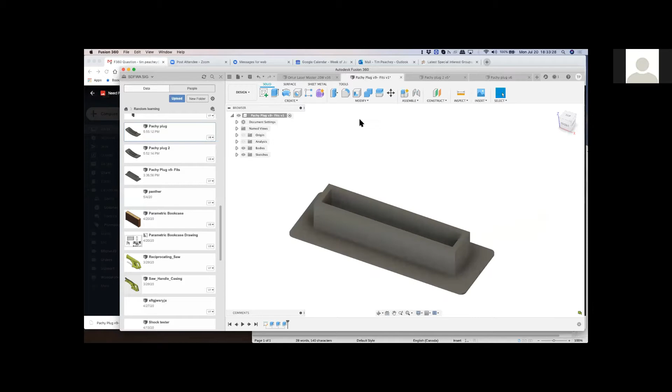Rob made this plug initially, and his question was, how do I curve this to fit into the curved surface? So if we look at the pig, this surface on the bottom has a slight radius to it.

Well, let's take a look at this picture here from the upside down part of the pig, or sorry, of the elephant. You can see there is a radius there.

Yeah, it looks like you 3D print it and then just use a heat gun. That's one way.

The challenge is that inside of it, you have... oh, now we're starting to get a crowd. That's great.

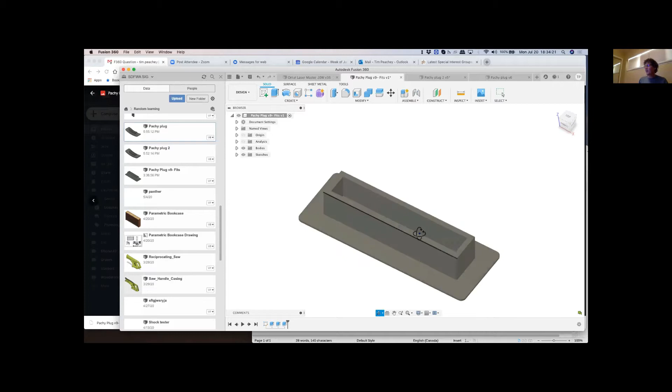Inside of it, you have these vertical walls. They're not going to bend quite as easily. You could notch them, but hey, let's do it all in 3D CAD so that it fits in nicely.

And so is the elephant in CAD? I don't believe that the piggy bank is in CAD. Otherwise, that would make it a lot easier to fit, because then you could try it and look at interference and get a nice, tight fit, etc.

But what I did is I took some guesses. So this is the version that I made, okay? And I'll step through it.

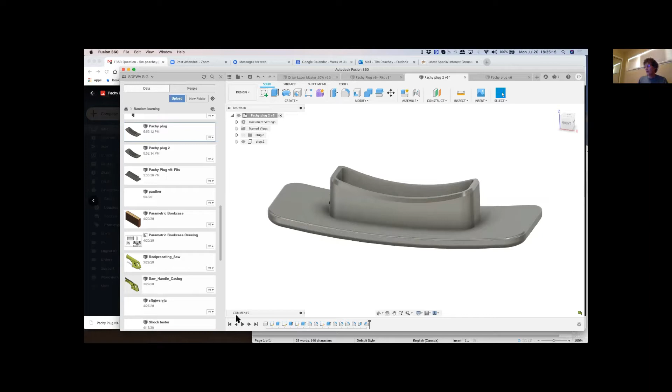Hopefully Rob will be able to see this. But where I started, actually, let's get a full screen here.

Whoops, that's on play mode, and I wanted to go on step mode. No, somebody's got some ping pong noise in the background. Might be Nancy. There we go. Yeah, sorry. No worries.

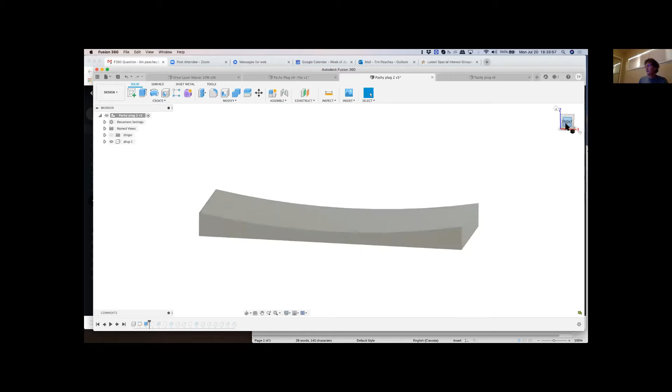So what I did was, first, if you look from the front, I made a profile, a side profile, so that I could get the radius here.

And for the time being, this is flat and sitting on the XY plane. And I made it with the XY plane as my sort of center of symmetry for everything. The origin, sorry.

Okay, so I, of course, started by setting up some parameters. And so I set up belly radius to be this radius here that we're trying to achieve.

The cavity radius, I actually wanted the little tube walls inside to match the radius here of the coin cavity, which is much tighter and not concentric.

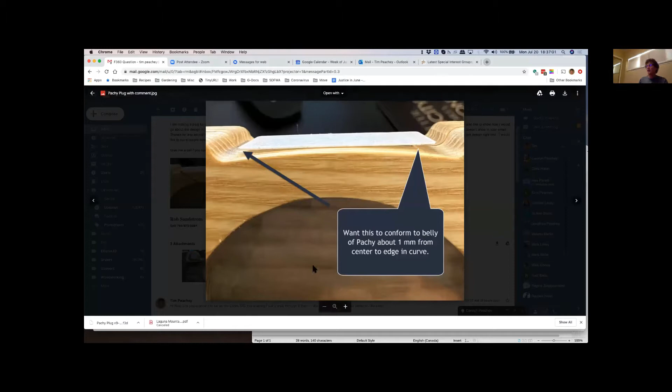I have the length of the... oh, that's something, yeah, the length and width of the slot, the coin slot itself, and then the length and width of the flange, the thickness of the flange, the height of the tube that's going to go up inside the slot, and the wall thickness for that tube.

And then in some variants, I did a retention bump, depending on what kind of material you want to use. I did a couple of different designs just to kind of play around with it a little bit.

But for the simplest design, I first made this curved profile that had the curved surface on the front of it.

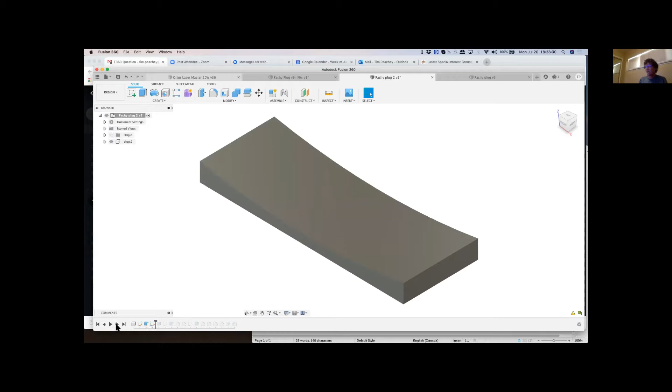I created a rectangle, and this is also created on the XY plane and coming straight up, and that's part of why I left this bottom surface flat for the time being.

So that was just a simple rectangle, or two rectangles. The offset on the rectangles is the wall thickness, or what I called, I think, tube thickness.

And then from the side, or from the front effectively, I sketched this arc with the edges here, and I used the belly radius to drive this curve. Okay, so you see these radii are different and non-concentric.

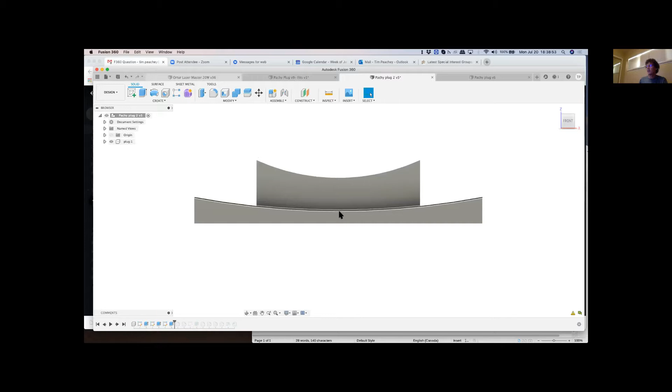The next couple of steps are really kind of clean up. I added some radii.

Then from the front, maybe I should turn sketches on. This would probably be this sketch here. So then I made a sketch from the front here using an offset from here, and chewed away the extra material we no longer want.

Okay, so now I have the shape I want. And after that, it's mostly cleanup. A couple of radii, fillets on the corners, fillets on the top edge, fillet on that inside edge just a little bit.

And I put a fillet around the inside just to strengthen that up a bit. I didn't put a fillet around the outside because that might interfere with the slot.

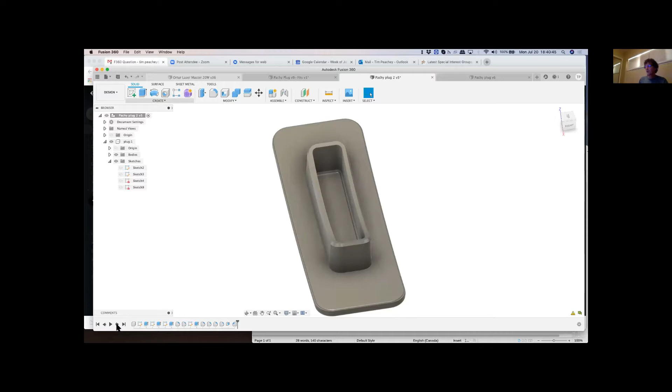And then I put a draft. So a draft adds an angle onto these surfaces, and that's effectively a taper on that rectangular wall, so that it goes in and creates a tight fit as you jam it in there. And then just to make sure that it would lead in fine, I put a chamfer along the top edge.

Now, I'm not sure, did we lose you, Rob? Nope, we got you back. Thought you were on mute though. Okay, I'm up here now.

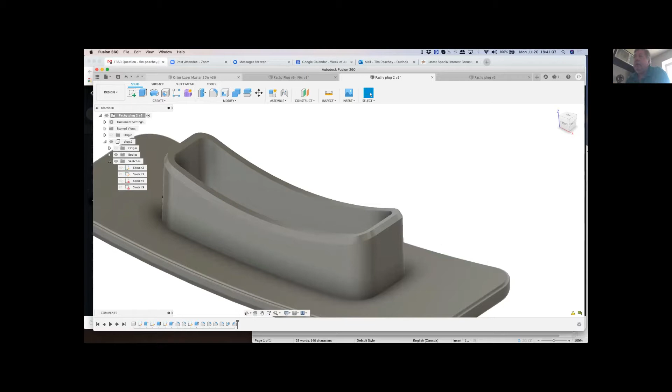So this is exactly what I was asking, and it looked like when you showed us the change parameters, they were similar to the ones I sent you in the file, or almost the same in most cases. So I'm assuming that if you sent me this file, it would almost fit, and the only thing I'd have to adjust possibly is the radius you have here, but it'll probably work just fine as it was. So that's exactly what I was looking for, is how do you get the radius?

Now, people with experience in 3D printing, I think I could just use supports and it would hold up these two corners because they're not radical radiuses, but you did the part that I wanted to make sure I could understand. And I was wondering if that's how you would do it, is kind of build some side sketches, and looks like that's the trick.

And the only thing that I would need to add is a couple of holes on each of the tabs to hold it into the bank. So somebody shaking it hard wouldn't pull the plug out. You know what I mean?

Yeah, I'm not sure what material you're using. Yeah, I did one 3D printer PLA. Okay. And I'm only making that little lip 1 millimeter, so it's real small, thin.

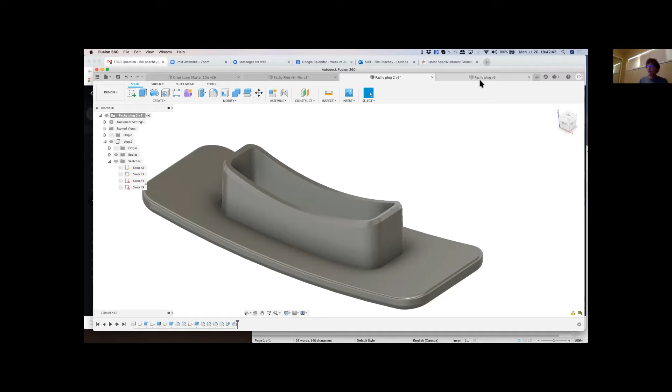Yeah, I did a couple different designs, and yeah, after I got your file, I went in, looked at your parameters, and adjusted my design to follow most of your parameters as well. Yeah, looks good. I like it.

I'm going to turn on my camera so I can eat my hamburger without embarrassing myself.

So here's a different version I did. If you look here, I've got, actually it might be easier to see from the front. I just got a little arc bump around the outside to act like a snap fit retainer.

But when I did that, I cut slots in the side because the rectangle wouldn't compress well. But in this case, if the PLA has any flexibility to it, it can just flex a little bit as you're popping that in.

Okay. Well, it's clear to me you have significantly more design experience thinking through all this stuff that I don't.

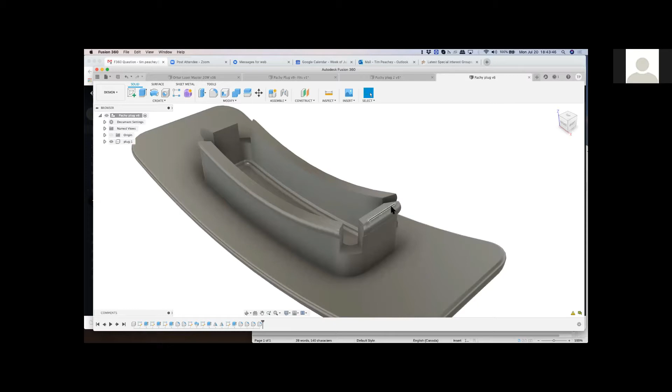It's, yeah, I'm hoping that I can help you guys with experience in the areas I have, and since I'm learning from a lot of you guys as well on the experience you have on the 3D printer itself, the woodworking equipment, finishes, all kinds of questions I have for you guys as I go with my various wood projects. So good learning, sharing makes learning all around.

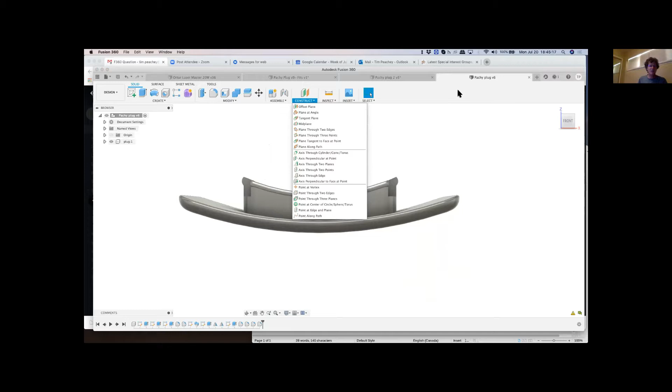Sometimes I'll use what's called, oops, I didn't mean to do that. I'll use an axis. So I'll define an axis and then use that axis as the center point for arcs in more than one sketch. That's another way to do it.

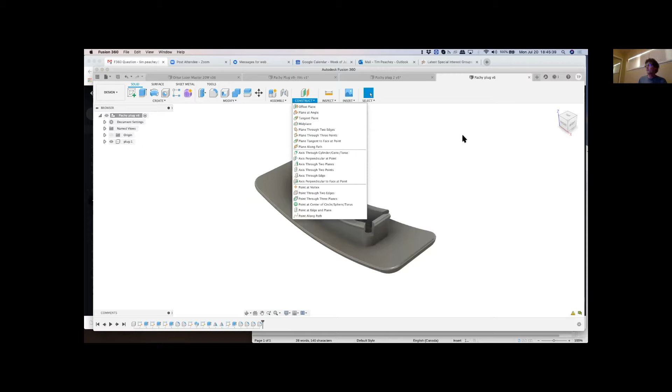Construction features, whether they're construction lines, planes, axes, points, are very, very useful. So they're virtual geometry that helps us define our design intent in the part, but aren't actually a physical part of the component itself.

Okay. Anybody else have any questions on this or anything else that you've been playing around with, looking at before we get into the meat of the evening? Anything else you want to hit me up on?

Well, Tim, I just want to say thank you.

Learning parametric design, I mentioned I had that router table I was putting together. That was amazing. I had different slots, different dado widths, things I wanted to do, and all I would do is change a parameter, and the whole design would change with shelf lengths and everything else. The first time I did it, everything changed except for one drawer I built. I had to go back and look at the constraints to figure out what it was tied to so it would move together. Once I did that, it moved together.

Same thing with this plug. I tried to use all parameters so that if I wanted to change the width or length, the lip and everything changed with it. For somebody like me who never used parameters before, mostly using SketchUp, that is amazing. It makes it a little more complicated to learn, but they are incredibly powerful.

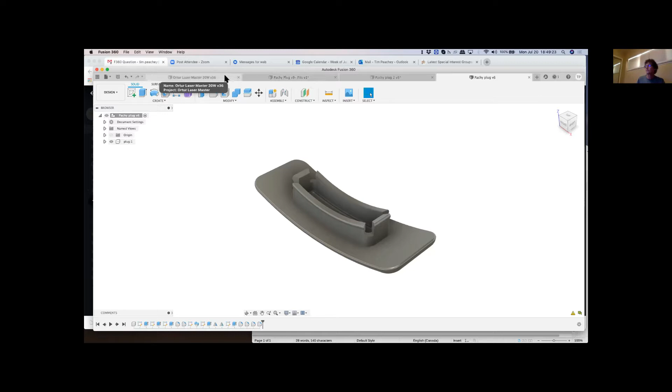Okay, anything else?

You probably recognize this - this is the model I used two weeks ago. I haven't added much to it, but this is my simplified model of the Ortur laser engraver. A lot of components are still missing, but the fundamentals are there, and it was adequate for us to look at assembly and joints last class. This time I want to look at animation.

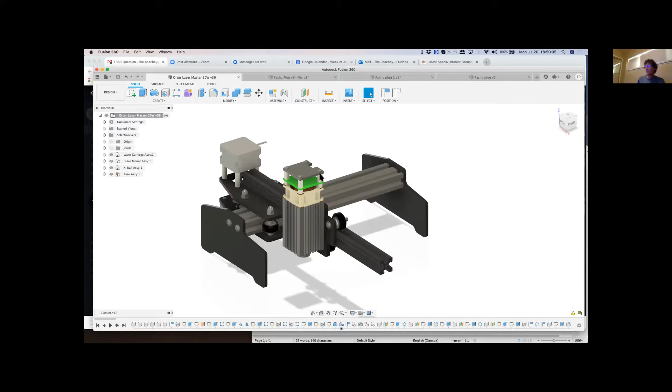If you remember, we set up a bunch of joints, and I thought I was doing this in advance of animation, which I hadn't really learned very well yet. It turns out they're actually somewhat independent elements. But we designed this as 4 sub-assemblies.

We can slide the laser module up and down. It's got limits. We can go in and animate this model up and down. Looks like there's some error in the limits on that one, but that gives you the basic idea.

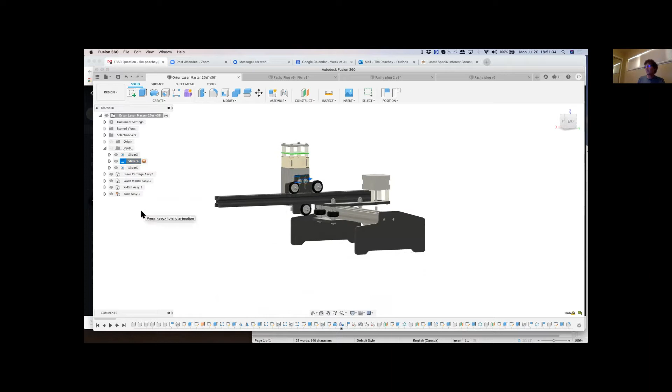We can animate it moving back and forth on the X axis. There might be a better way to stop it, but I'm using escape to stop the motion because it just keeps going.

So like myself, most of you probably assumed this is a precursor to animation, and it's obviously a form of animation. But the animation functionality in Fusion 360 is independent of joints. It doesn't recognize joints. That's good and bad. It's good in that you can go in and do animation, exploded assemblies, etc. in your models, even if you haven't captured all your design intent in joints. If you've done a lot of design in place, it still works.

It's bad in that you might want to use animation as a verification of your joint design, kind of like a mechanical simulation.

So when you go to the animation workspace, you get a slightly different user interface. In the browser, you'll see the components and the component tree. Sub-assemblies will pop up there, but there's no bodies, no features. The timeline's replaced by an animation timeline.

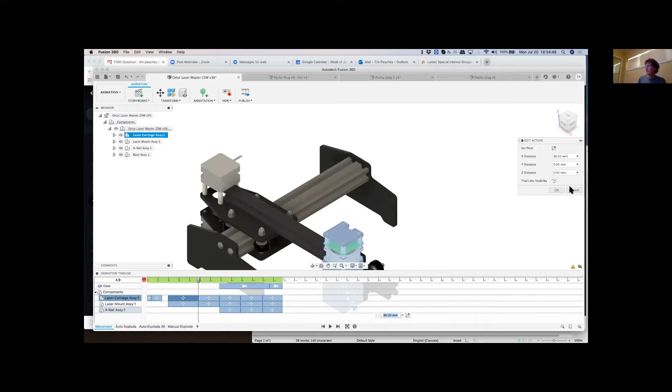Once they're here, we can edit them. We can move them to a different sequence, we can change their duration. If we edit an action, for example, we can change how far it's going to move. In this case, it's an 80 millimeter move, and we could change that in the X direction.

Once we have the animation in place, we can also animate the camera behavior, and sometimes we do this without actually intending to. I'm going to get rid of that one. Right now, when I'm moving things around, it's actually capturing some of that. If we store the playhead in what's called the scratch zone here, then if we move things around, it's not captured.

Or if we turn off the camera -- right now the camera's kind of on -- but if we have it out here where we're doing things, and then we move some of this stuff around, it will assume that we meant to do that as part of the animation. So that's a little warning. I'm going to delete that.

If you looked at any of the videos I tagged in the post I made today, one of them, the first one, is doing an exploded assembly, which we're also going to do here. The second one was actually doing an animation of a toy, in that case a toy helicopter.

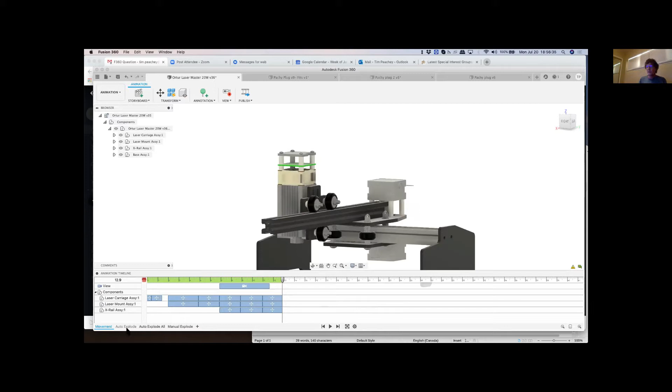There's a tool called Auto Explode, where you explode an assembly, and it's of marginal utility. If your assembly is pretty simple, you might be able to use it and maybe edit a little bit after the fact. But what this looks like is, in this case, I did it by subcomponents only.

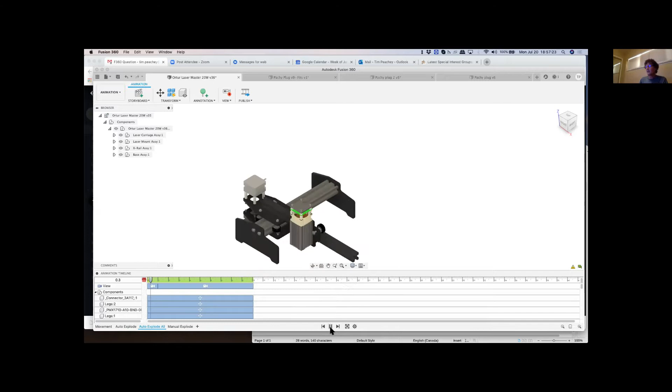In this case I did a full explode -- let's go back to the beginning and do that again. So now it's zooming out to make room, and it's exploding all the parts so that in theory you could use this for an assembly drawing or a parts list or something like that.

The problem is that where it puts things automatically is rarely where you really want them to be in a good exploded assembly view or exploded parts list. Do you have the ability to move those around once it explodes? Yes, you do. So, for example, you can come in.

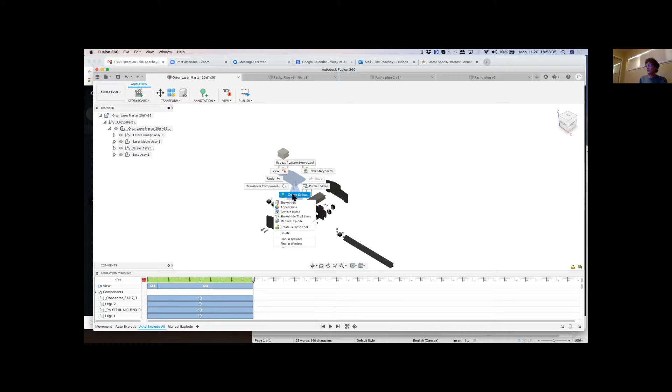You can find your part here, and then do an edit action. It's going to come up, and you can change it. Say I didn't really want it there, I'd rather have this piece over here for some reason. Now it'll save that as the new desired exploded location.

And when you rerun the animation, that's where it's going to put it. That's not a particularly good place, that was just to show you how it would work.

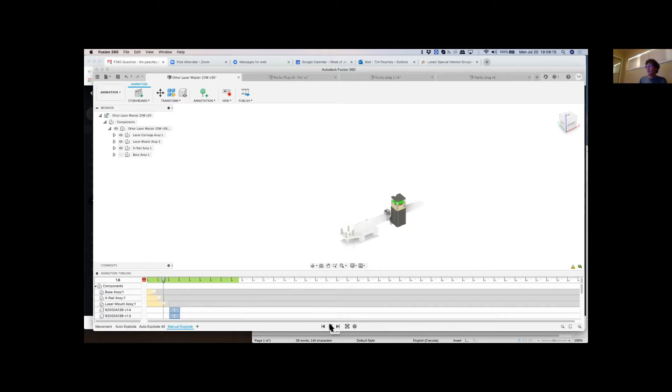What you're more likely to do, especially if you want something accurate, exact, or detailed, is a manual explode. In this case, I'm doing a couple of things: turning off everything except the laser carriage assembly, and then exploding the components of it.

Now you might say, hey, I thought you said it's for an assembly purpose, that looks like disassembly. And you're right. Interestingly enough, if you right-click on the storyboard name, you can hit reverse the whole storyboard, and when you run it, everything happens in the opposite direction.

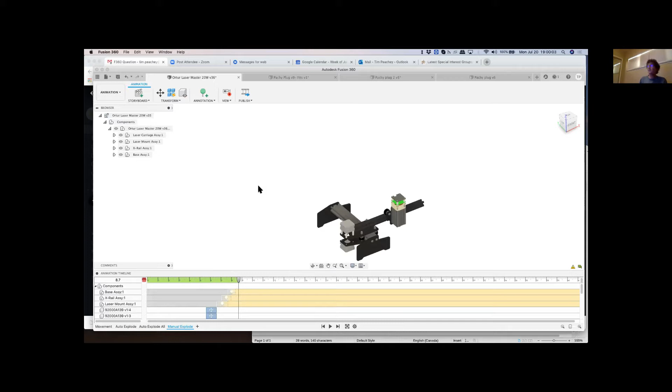So it's pretty basic, that's the key part of it. That's what the videos look like. There is an annotation which is not that useful.

I did use annotations here, and in Fusion 360 you can click on them or roll over them and see what that annotation is. But once you create the MP4 file, none of that happens. You just have these silly stick pins, push pins around that don't do anything for you in the video.

So I'm going to create a new storyboard, the same thing you'd do if you came in with a new drawing or new assembly, you'd automatically start with the first storyboard. Let's add a storyboard. The question is, do you want it to be clean or start from the end of the previous? Like I said, you can make your storyboards consecutive or not. Let's start clean, and now here's my model.

I'm going to put this in the scratch zone because I want to move this above the animation timeline here, since it gets in the way. So there are a couple of things we can typically do.

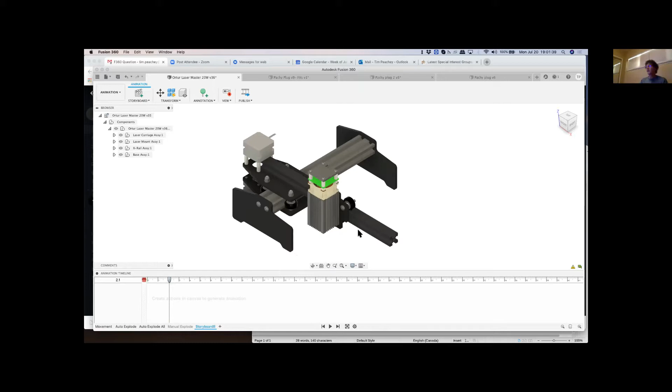Let's say in the first 2 seconds we want to do something. What do we want to do? One of the things we could do is go to a front view. So now our animation consists of moving to that front view.

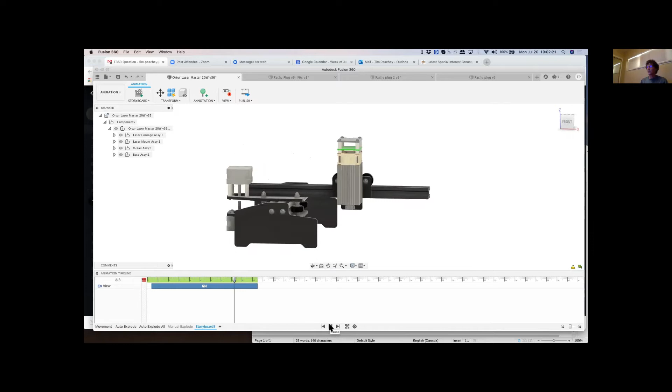Having done that, later when we've made a bunch of other changes, we can move this camera action to a different time, we can make it longer, etc. So we have a lot of ability to change things after we've done them the first time.

I actually can't see much in this, so I'm just going to delete that camera action for now. I'm going to go back here, and say that in the first second we'll do the animation routine.

So in the first second, I'm going to take the laser carriage assembly. There's a couple of different ways I can do this: I can right-click and say transform component, or come up here under the transform menu and transform components. There's even a shortcut key, M, in this case, which I guess is kind of like move.

So let's transform this component, and we can either do it manually, like any other move, or type it in here if we know exactly what we want. The transformations can be X, Y, Z, or rotating about the X, Y, Z, not about the axis, but at an angle around there.

And if we're rotating and it pivots somewhere we don't want it to, let's say for example we wanted to pivot about the X-axis, and we put in 30 degrees, and said, well, that's not what I wanted it to pivot around. What's it pivoting around? It's pivoting around basically the base of the laser, and I wanted it to pivot around something else.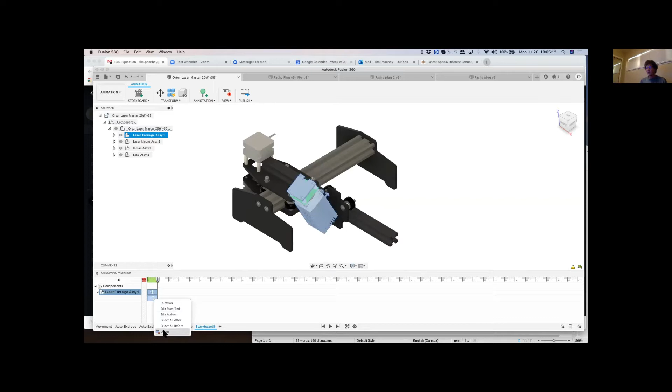And it crunches. Oh, it didn't work actually. It didn't do what I expected it to do. Somehow I didn't get that pivot in the right place. Let me see why that is.

This transformation here, if I set a pivot, oh, it broke the two actions. It broke the two actions. That's kind of interesting.

Pivot has no meaning when it's X, Y, and Z only, does it? So when it does this, it's not compliant with any, or you're not restricted in any movement, any legal movement of that component within the assembly. Correct, that's a very salient point. You can crash into things, you can go through things. It has nothing to do with the joints, it has nothing to do with reality. It's blindly following what you tell it to do.

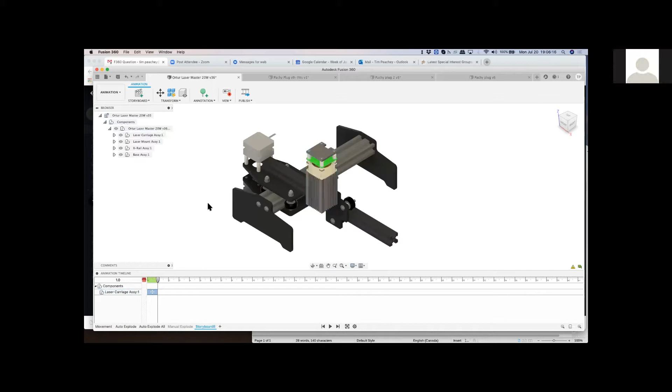Okay, so maybe I want to move that back down in another second. So I'm going to come here and do that transformation, except this time I'm going to go... come on, it's the set pivot, I've got to figure out a little better how that works. But I'm going to go minus 10 in the Z direction.

So now when I run my animation, something went weird. Something went very weird here. What happened? Instead of going in Z, it looked like it went in Y or something. Yeah, that set pivot, I did something wrong with the set pivot.

I'm going to delete and redo that part because that set pivot messed things up for me. And I'm also going to do it a little faster while I'm at it. Let's go to half a second, and let's do it this way. We're going to say transform, grab this guy, and do 10 millimeters in Z.

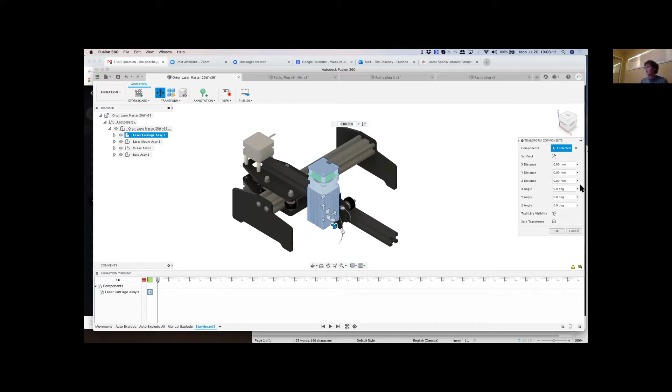And then we're going to do another half a second, and we're going to transform, and do -10 in Z. Okay, and now when we run it, it's just going to pop up and down. So kind of showing us that that's possible.

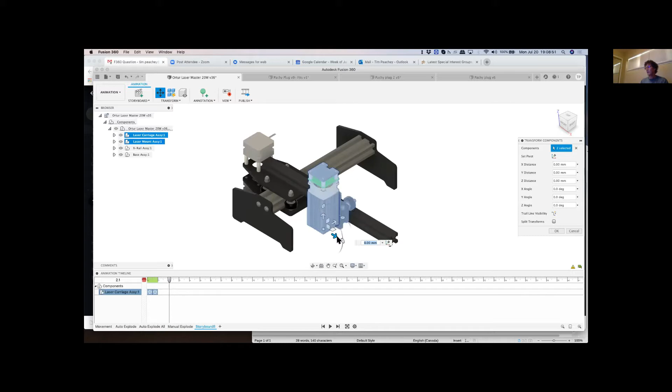Now, next, I'm going to take 2 seconds, and in those 2 seconds I'm going to move. I'm going to transform, but this time I want the laser carriage assembly and the laser mount assembly, and I want them to move out to here. Okay.

And sometimes it does a weird thing, so you got to watch this thing, it can't always be trusted. So this did something that it shouldn't really be doing, but you need to catch this. So when we run it, it's going to go up and down, and the carriage moves before the laser does. And when you look down here, you see on the laser mount timeline, it started at the half second in rather than the second in.

So a couple things you can do. One is you can come here when you're down to the 2, when you have the 4 arrows, that means you can move the whole thing around. But that's not really what we want. If you go at the 2 arrows, you can now move the start, and you can do the same thing at the finish.

The other thing you can do is hold your Apple or Control button, select them both, and then say duration, 1, and let's do this again, and we should be able to align end time. Now they're aligned. Now they should move together.

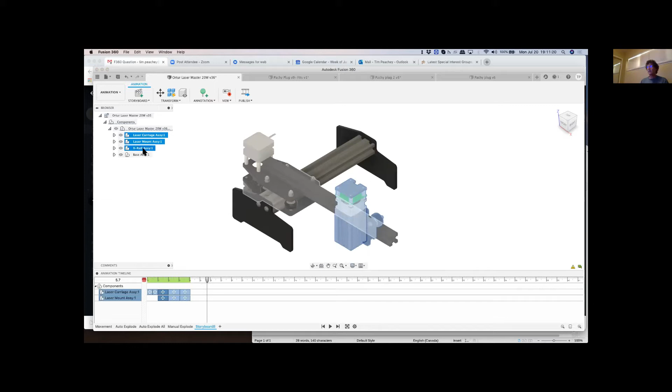Now I'm going to come out with the next second. I'm going to add to this the X-rail assembly. I'm going to transform all 3 of these in this direction. And again, just to show you, there's no physical reality. We had limited the joint there, but it's not limited to the joint, so we can do this. And when we play it, you can see the actions we did. Blindly following.

So can you tell me what the difference is between the simulation and the animation? So simulation is something entirely different, it's really should be called analysis. It uses a technique, a computer technique called finite element analysis, and it gives you the ability to analyze when things are going to break, or how heat transfers on them, how they vibrate. So it's really an engineering analysis tool, simulation is. It's not something I would typically do with woodwork.

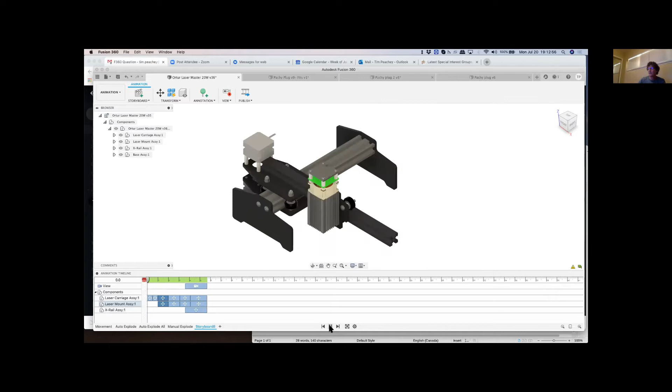So that's the motion part. And then, oops, I accidentally made a camera action. But let's use it. So when we do this, see that camera action where I zoomed in and out? That happened there. That's not what I really want though.

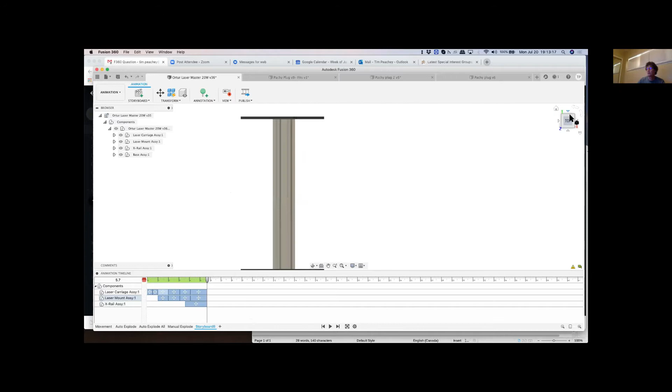What I'd rather do is let's go to the top view now. Okay, and zoom out so we can see it all. Okay, so now if we play it, that's what it's going to do.

And again, we can take this camera action and put it in a different location, change its duration, and now it'll do that on different timing.

And when we're done with it, we can publish the video. We can choose the current storyboard or all storyboards. It'll just chain them all together. We can pick video resolution. And we say okay, it'll take it 15, 20 seconds. It'll sit there and crunch away, maybe more depending on your animation, how complicated it is, and generate an MP4 file.

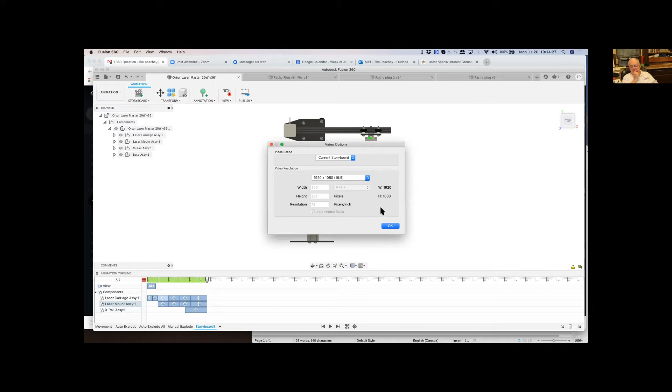And the MP4 files are actually pretty good. They're much smoother. You see how jerky the animation is here? It takes a little bit of time. It computes it on the cloud.

But let me, where was it? We don't need that. We need this one here. Let me bring it over here, and you can see what it's going to look like. You see that's a much better resolution. Smooth motion. It's not quite render quality, but it's pretty good.

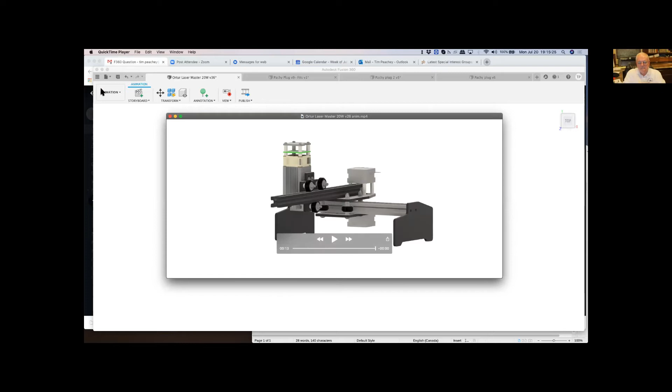Okay, let's see here. Where are we? Did I miss what you were saying about the belts? Or have you figured that out yet? I haven't. You didn't miss anything. I did. It's going to be tricky. Yeah, they're a little trickier. If you go to the Autodesk website, there is a demo that includes a belt. And I had looked at it back a few months ago when we started this exercise. And we started looking at Fusion 360 and haven't gotten back to it yet. But yeah, I want to do the belts as well at some point. And I was thinking too, what I should do is put either some kind of tread or spokes or something on those little wheels and show them moving just to be more complete.

Now, do you have like a real simple drawing with maybe 2 or 3 parts that you can just show us from the very beginning, from when you come in to this screen, how you do it?

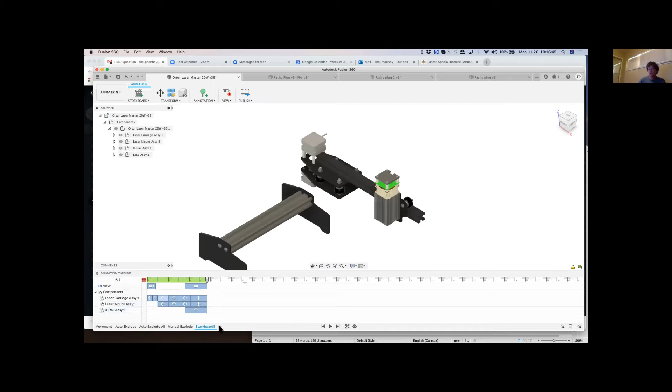Yeah, you know what? Why don't I just bring in the, well, let me do a new storyboard. And what I'll do is, actually, let me cancel this. Let me go back to the design workspace, and I'll just simplify this by turning things off. So I'm going to only have this element here, which has a few components. Okay? And we'll do the exploded approach, which is very similar and related.

So we'll go to animation, and I'm just going to do a new storyboard so this would be like we just came in from scratch. And now I'm going to do what I would more typically do, which is a manual explode, where I'm specifying what's going on.

So if we go to manual explode, and I'm just going to look at this guy here, and it's more than 3 or 4 components, but a lot of them are kind of paired together. So at this point, I want to explode basically almost everything. I don't want those guys, I want these guys. So all these guys here, I'm going to explode.

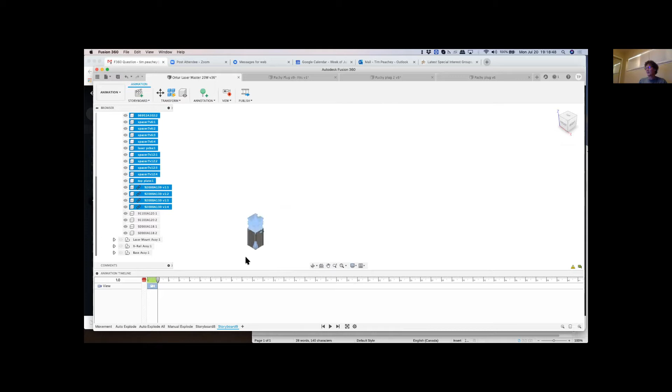And what I'll do is, I'm going to explode them in Z. Whoops, did I get something I didn't want there? These guys here. That's the problem with using part numbers. Let's cancel that. Let me figure out which ones those guys are. And meanwhile, let's zoom in a little bit. We'll get that guy later, but...

Oh, that's these guys. Okay, so what I really want to explode is from here, oops, from here up to here. Come on. Why? Oh, wrong button. Shift is what I need this time. Up to here. And then I want to add in the fan and the lens. Okay, so these are all the elements I want to explode. I'm going to do a manual explode in Z. And I'm going to play with the explosion scale here a little bit.

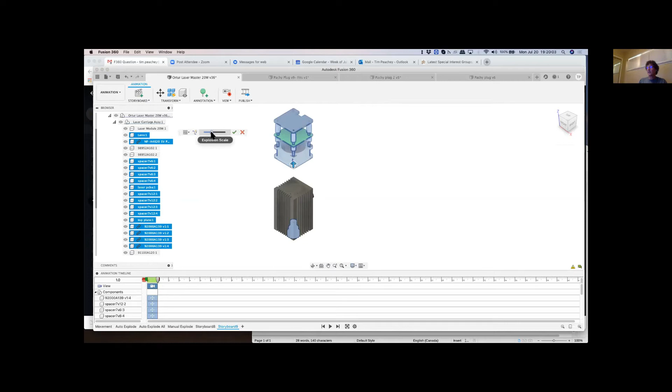And it's done something, but it's not quite what I want.

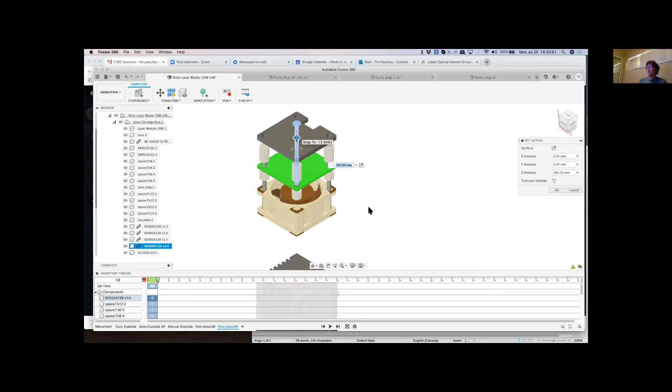So I can either do this and edit it, or I can do them all one at a time. If I do them as a group, now where did those screws go? Those screws are inside there. What I can do is come along on any element here, come down, find the elements, edit the action, and drag them to where I want them. And they'll update. Okay, in theory they'll update.

Did I hit the wrong button? Edit action. Come on. It's not playing nice with me. 100. Okay.

So that's one way you can go about it. Things are a little slower tonight. It might be streaming video in another room eating up some bandwidth here. Since Fusion 360 uses a lot of server calculation, it is affected by bandwidth.

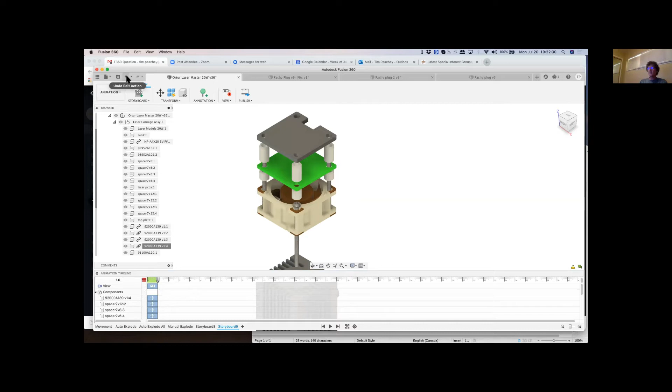I'm going to undo the explosion and delete the camera action so that we're starting over from scratch. And I'm going to try and do a little closer to what Howard was asking for. Let's try and do this a little simpler. So...

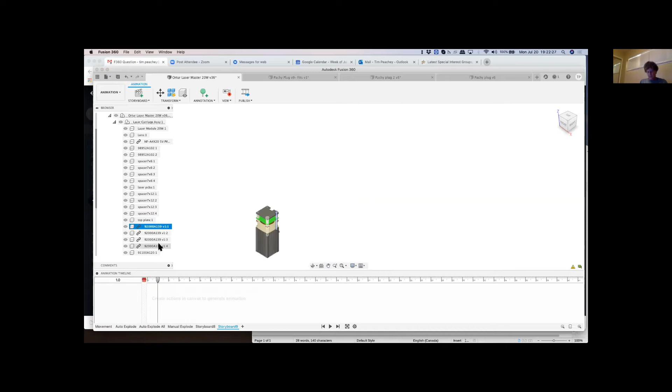What I'll do is start with these 4 screws. I'm going to manually explode them in this direction. My explosion scale is going to be up somewhere like this. I have a couple of options here. You'll notice something called trail line visibility. Sometimes when you see exploded drawings, you see the little dashed lines that indicate where elements came from—those are called trail lines. We can choose to turn those on and off, and edit them later as well. The other thing we can do is do it as one step or sequential. In this case, we'll do one step, and later we'll look at sequential. I'm going to say OK.

And now those 4 elements were all created in here. So now when I do my video, up go the screws. I'm going to add another second in here. And during this second, I'm going to grab this guy here and manually explode him.

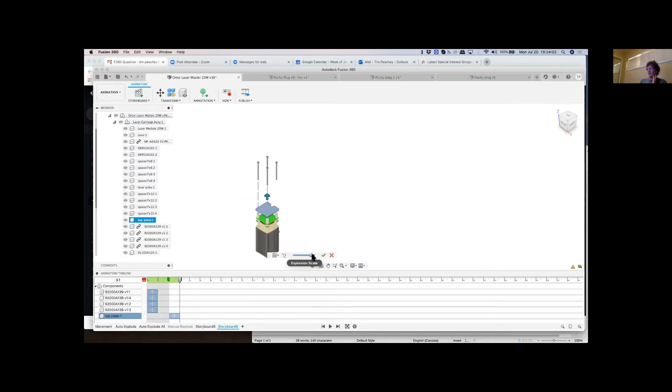Again, same thing, just coming at it a different way menu-wise. And it's a little bit flaky. You think you can grab it like a move, and you should be able to, but instead it uses this explosion scale. For some reason or other, it's quite the scale here. That's not really what I want. So I'm going to edit this action, and instead of 12, let's drag this up to about 100 and say OK.

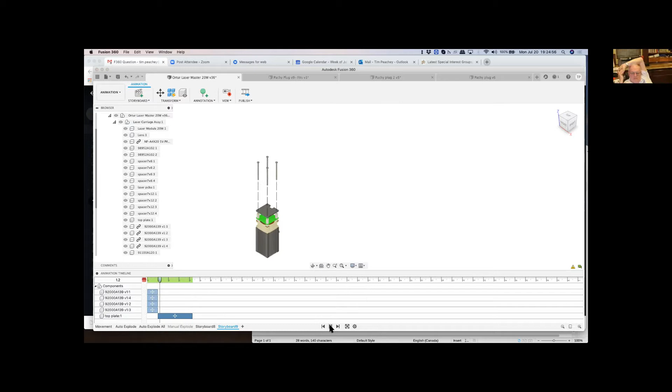Now I can go—actually, I didn't want that to be right there. Let's move that over so it's between second 1 and second 2. If we want to, we can make it really slow. Or if we want to, we can make it quicker.

So now I'm going to say in the next more or less 1 second, I'm going to grab these spacers here. I'll do a shift and grab all 4 of them, and say manually explode in the up positive Z direction. This time I'm going to use sequential explosion so you can see how that works. And say OK.

And now, see, it put them in, but it spaced them out 1 second each. So now when I do the animation, screws go up together, but—whoops, those guys aren't doing it. So the first one did what it was supposed to do. These guys didn't really do it. So it flakes out a bit.

So you come in here and you edit, and you say, what's going on? This should be 50 millimeters, let's say, okay.

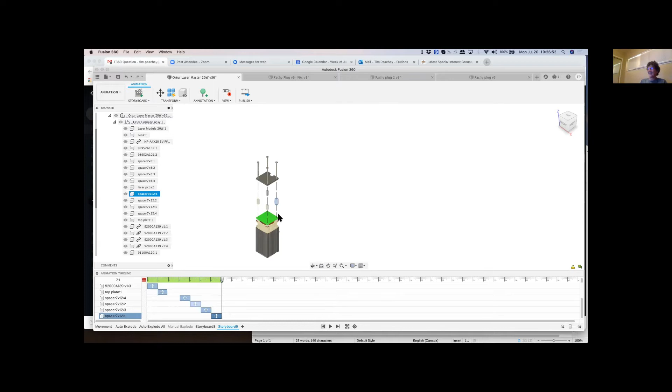Now this one here didn't... oh, it did. You know what happened? These are in line, the front one and the back one. So this one looks like it's the back one and hasn't gone anywhere, but in reality, it's the front one. So when we turn it, we'll see that actually they did explode. Let's move this camera change back here so we can see that happen. Make sense?

And that fundamentally is animation. It seems like a really complex subject, but it's a fairly simple one.

I have a question. Fire away. Okay, so I'm kind of a chaos monkey—what happens if you change your design? Does the animation stay the same? Let's try it. That's a very good point.

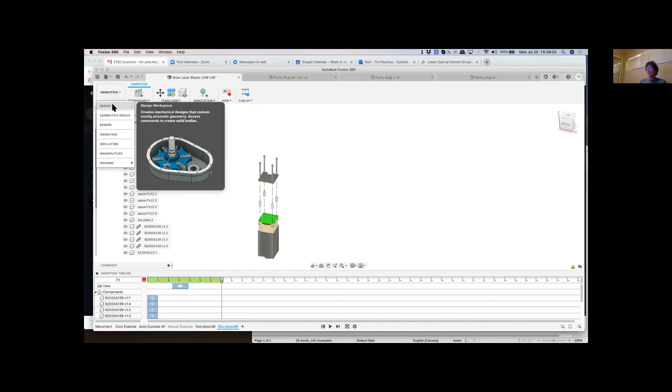Let's go back to design. In this design, what I'm going to do is go to the laser carriage assembly. I'm going to come down to these spacers here—these two spacers I'm going to delete.

I'm not going to save this, so let's do that and see what happens. Now let's go back to... I've got warnings. It's complaining, probably because other components reference them.

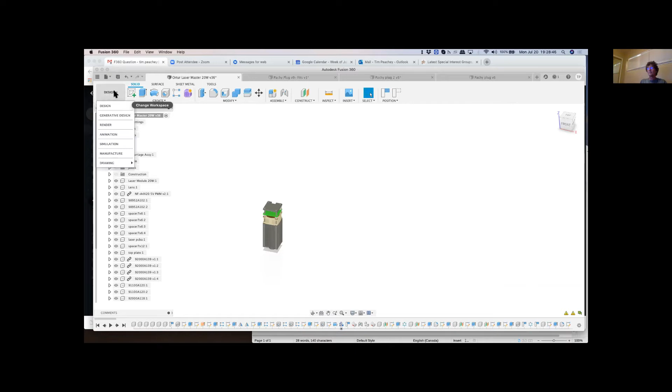But let's go to animation and run this animation again. Yep, those guys are just missing. Okay, and there's only one spacer down here on the timeline. Good question, though, because chaos happens when we work.

Does anybody have any questions, suggestions, or thoughts on the animation? Animation seems really complex, but it's actually simpler than a lot of the modeling is.

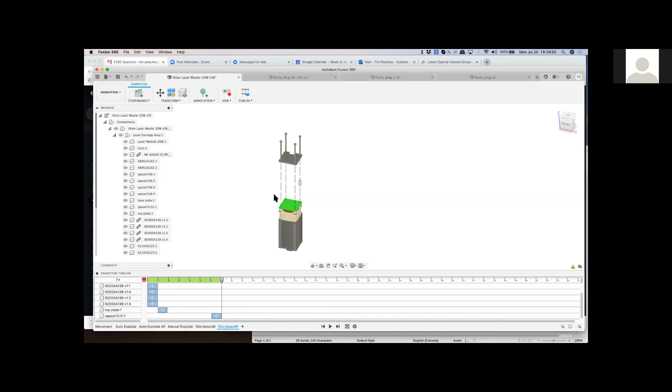Well, if it doesn't respect joints, then it probably doesn't respect other components either. It doesn't respect other components that it moves. It can crash into components. It can explode one part right into another. They can exist in the same place in space.

It's very, very simple, very basic animation capability. Basically, move or rotate. And when you put the moving and rotating together, you can do some interesting things.

The second video in the post I made today on the bulletin board has an example of somebody with a toy helicopter, and they spin the rotors as they move the helicopter up. So you can do all kinds of animations that look like they're linked, and play with the timing—turning cogs, turning gears, moving belts.

But in reality, you have to manually make sure you synchronize things. So if you have a big cog and a small cog, you need to rotate them and figure out the rotation yourself. It's not going to simulate it for you.

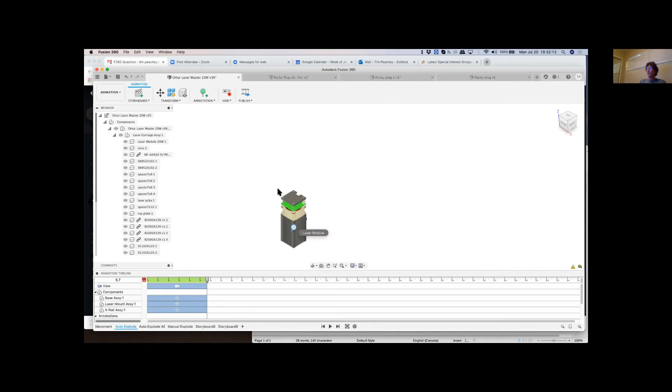And there's no way to put titles on or anything like that. The only way I know to do that is you create the MP4 and then take it into Adobe—what was it called, Director maybe—or I use something else. What's the tool I use? Somebody suggested it to me. It's called Filmora. Then you edit it external to Fusion 360. It doesn't have that ability to put good 3D annotation on a video.

Now, that begs a question as to what level of annotation is possible. I don't see any annotation features.

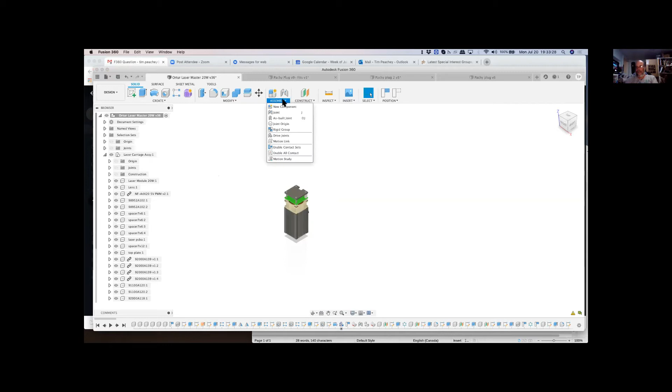Once you get the video of the object, you could bring this into other video editors and add your own annotation and stuff like that to it. It's unfortunate. I'm not sure about SolidWorks. I know in Pro E you can put 3D labels on things, and in animation they come up and follow whatever you've attached them to. But I don't see that capability here.

Okay, thanks. You're welcome. Any other questions on animation? On anything else? Anybody with show and tell?

I have a question basically on the animation. You said there are storyboards—you can create multiple storyboards and they're saved with the design file? Yeah, they're saved with the design file.

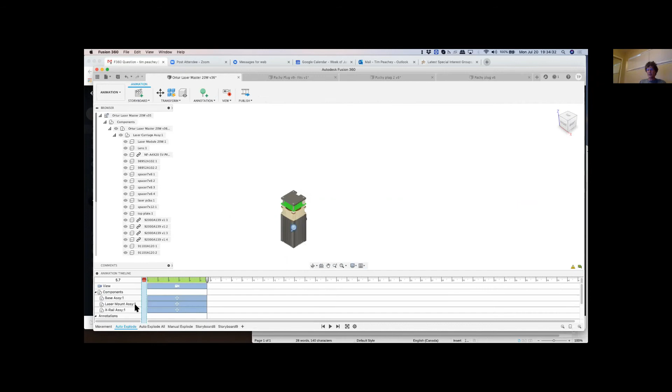And when you go back to the animation workspace, you'll see the multiple storyboards down below. So all the storyboards that I did earlier today and the two that we did tonight are still in here, and they'll be saved in here.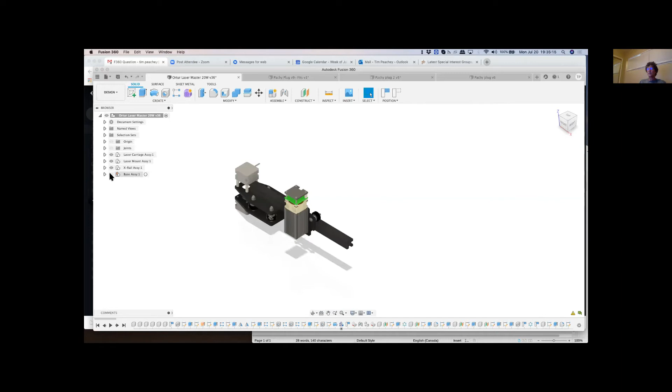Now you notice that even though initially in these earlier storyboards we saw all the components, because in design mode we hid them and turned off their visibility, they disappeared from view in the animations. Now I went and turned them back on.

And then when you publish, if you select all storyboards, it'll just make one long video with all your storyboard animations in them.

So everything that you want to animate has to be a separate—what do you call all these? Component. Components, yes. Yeah, you can't animate bodies within a component.

So now we have two levels of components. I have these, what I call sub-assemblies, and each of these sub-assemblies has multiple components. And I can either animate the sub-assembly as one element, or an item within them.

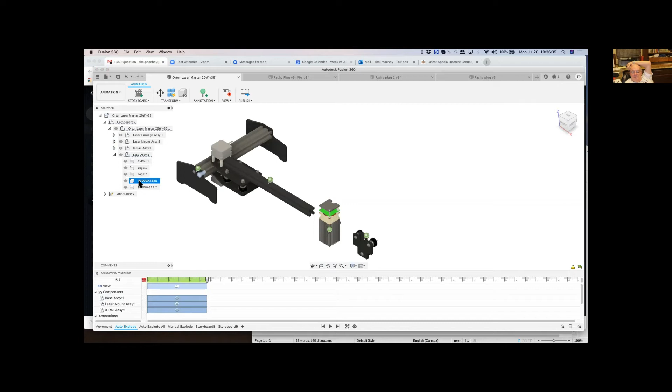Okay. So I can grab this guy and transform him as one subassembly, or...

I can grab one element within there and transform him. Let's say I want to do it this way, just the single component within the subassembly.

Okay, but what I can't do is—I have to define them as components, not as bodies.

Okay. Nobody's got show and tell for us? We're coroned out.

Did I miss a video when you talked about how to build cut lists? I didn't. I've been doing some research on that, and I saw a couple ways to do it, but I'm not ready to demo something like that yet. I just was wondering if I missed it.

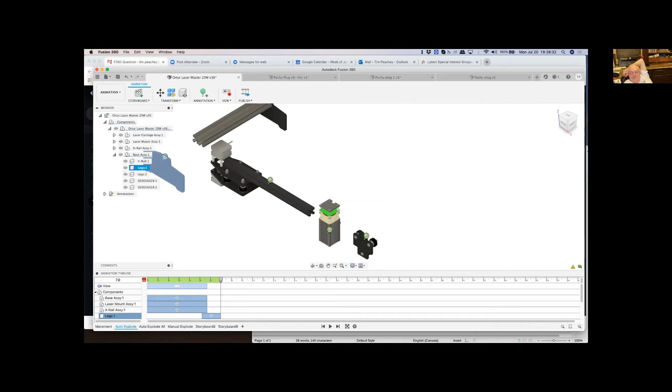Nope. I'm looking for subjects for future sessions as well. If you have suggestions, things you'd like to know more about—working with assemblies, importing things, or creating complex shapes? I think more about complex shapes.

Okay, well, one thing I was thinking for a lesson soon would be lofts. We did a little bit of sweeps, and I'll look and see how complex the sweeps are. If they're just simple sweeps, then we've kind of done it, but I can go over it a little again. Lofting, we really didn't get into.

So complex shapes—when you talk about that, are you talking about different shapes? Like when I asked how do you actually make that curvature, and you had a draft. So if that's what you guys are talking about, that's what I struggle with—how to take a shape and apply what you called a draft, or taper. What each of those kinds of shapes are and what you can do with them—I'd agree with that, complex shapes.

Maybe I'll go back. I mean, extrude is pretty straightforward, and revolve we know—those two are the basic ones we use 90-plus percent of the time. But sweep, loft, rib, and web are useful, more in plastics design.

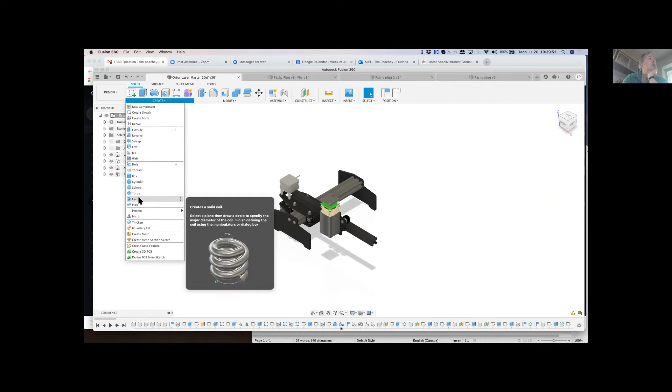So where was the draft you talked about? Draft is a modification. Basically what draft is, it's taking a vertical surface and applying an angle to it, tapering it. Can you do that with a cylindrical surface too? Yes, you can do it with a cylindrical surface as well. And the primary purpose for draft, historically, is in mold making, so you can extract the part from the mold itself.

Because the only way the part's going to come out of the mold is if you can get some clearance in there, so you need a taper so the part can drop out of it. That's kind of the way I understand draft. But yeah, we can look at some of the more complex creation features and some of the more complex modifications as well in the future.

Good. Anybody ready for happy hour? Yep. Yes. Good. What's everybody drinking?

Modelo Especial. Excellent. Moscow Mule. Nice, Moscow Mule—oh, that's one of my faves, and I haven't had one in a long time. Trader Joe's makes a good ginger beer, it's a little bit crisp so it works well. Yeah, it's got a good bite. I like that one too.

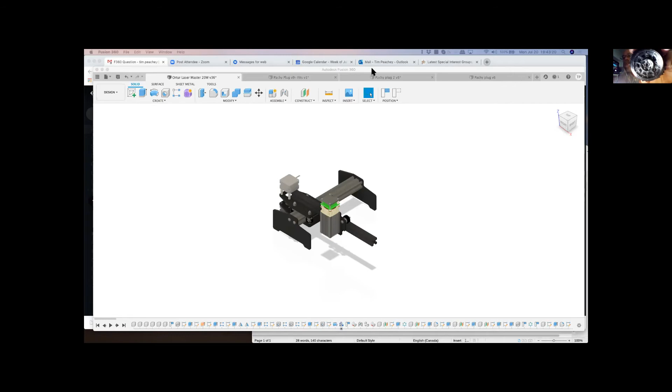Okay, hold it up again. He made you big now. So what is it? Wow, oh, this is a wheel. That's what I was gonna say. This is a wheel for an RC car.

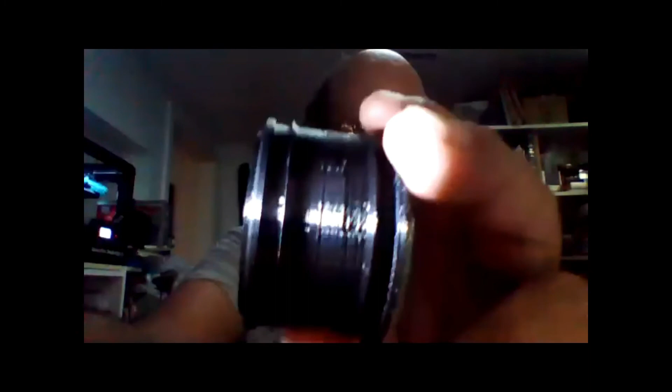My brother, who's a machinist, just found he's getting into RC cars a little bit and asked me if I could do a 3D print one for him. So this particular stuff came out really bad. I mean, like I said, I spent like an hour calibrating this thing, and then I just got sick of it after, and each one takes 3 hours to print.

So then I went ahead and said, screw it, I'm going to take that out. Let me try this other PLA that I got, better brand. I've talked to some people. I've got one going over here that's printing nice. And this one came out - look at the difference. This one came out, I did no cleaning on this one. This is how it finished.

You know, that's what I found out recently, Doug, is the PLA can make a big difference, it seems like. Yeah, the inland PLA is what I used before. Before COVID, I used inland, and I hadn't printed for probably a couple years. And then COVID came around, and I'm just like, okay, I need to get plastic. Inland was what I was getting from Micro Center, and they must have changed their mix because it prints like crap now. And then I went ahead and talked to some buddies, and they said, oh yeah, Hatchbox is what I'm using now, and I could get some. Hatchbox is what I use. Yeah, made a hell of a difference.

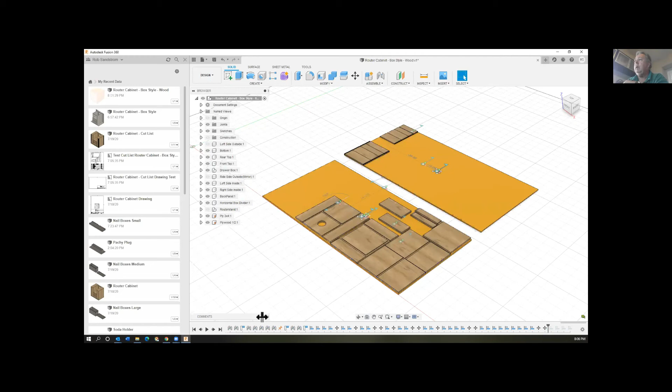And then what you can do is, if you see I'm moving the timeline back here, as you move the timeline back, all your pieces go away. But you can get back to the point, so you don't even have to make a new drawing. You can make a new drawing and save it with just the cut list, or since you went through and moved everything, you can just move everything back to where they were originally. You can see my stand building over here in the corner.

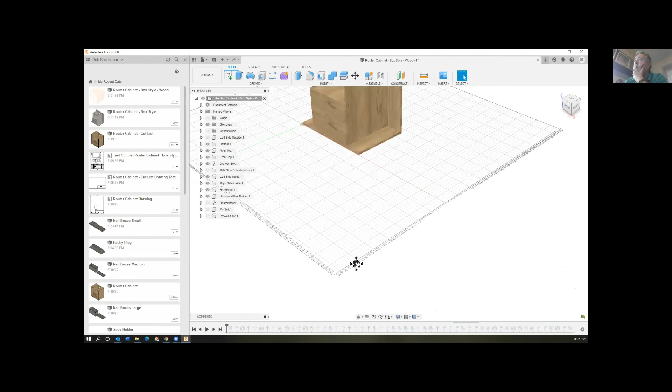So once you get back to that point, turn off the plywood, and now you're back to the point where you actually had your stand to begin with, so you just disassemble your model. Yeah, I just disassembled my model and put it on a plywood stock. That's separate - notice I made them separate components so you can turn them on and off.

So is that an easy thing to do, to orient and move them around on the plane? It's somewhat easy, I can show someone if they want, but it's time consuming. That's the thing that's frustrating. It's easy to sketch up, but in this, I figured it out - I watched a video on how to do it and it worked well.

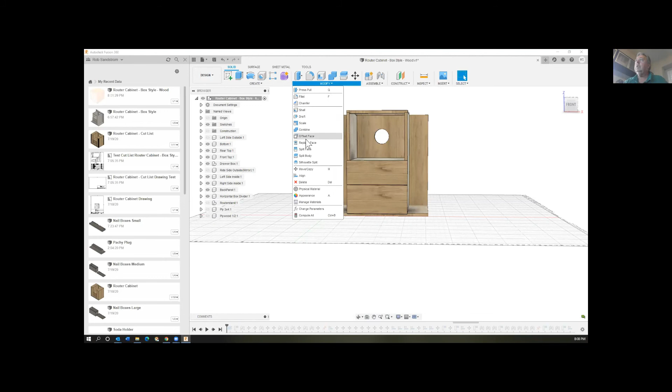And of course the nice thing is, by putting the stand parameters inside, I knew when I made my sketches and stuff, it would fit inside the stand. And that interesting thing is - I'm going to take the stand off for just a second - what we were talking about before, which I thought was just awesome, the cat's meow, is if you go to these change parameters, for example, I wanted to know how much room I could have on the sides of this cabinet to be able to put router bits and stuff in.

So if I wanted to change that, I just go in here. For example, if I wanted to make the spacing smaller so I have as little as possible and bigger drawers in the middle, I just changed this parameter you can see, put like 8 between the spacers, hit OK, and next thing you know I've got these great big sides. Did you see how that changed?

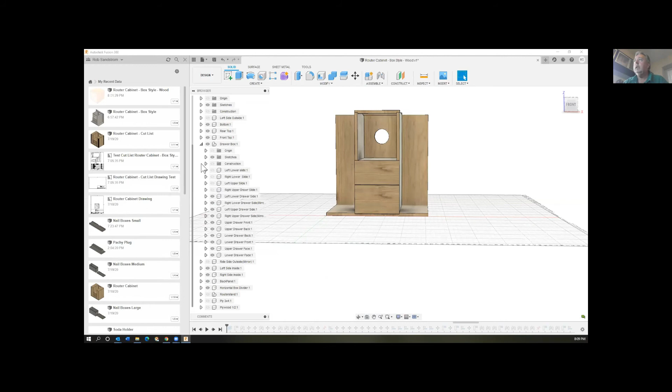Yep. And then if you take off the front drawers, let me take the faces off. You can see the drawers and sliders and everything inside changed. All I did was go in and change the one parameter to say I wanted the dado places put somewhere different, and you'll see it'll change right back now. See how they made them smaller? And the drawers got big? Yep, that's the idea.

So that's an example of how you can get to a cut diagram. And in the cut list, you already showed us before, Tim, using the drawing feature. You can do the same thing with the cut diagram. Once you get to a cut diagram, if you make that your view after you moved everything over, it will actually take that view and put it on that drawing and have all the pieces you can diagram out. It just takes a long time.

It does. That's the thing I was kind of disappointed with. Yeah, you've run into that too, Sam? Yep. I want to have dimension drawings so I could take it in the shop and make something, right? And to get there after you have this model is still really time consuming. Yeah, it's almost as long as it takes you to draw the model. Yeah, I agree.

Now, the drawings don't follow when you change the parameters, right? Yeah, actually they do, that's the cool thing. The drawings? Yes. So if you make a drawing - I'm going to do one over here. It's messed up because I totally messed it, but let me put this drawing up for you. There's a little update button you got to hit though, right? Up to the top, that's what I was going to show you. So here's a drawing. You see this warning down here, and I'm not even sure how well the drawing will pop up because I made so many different changes.

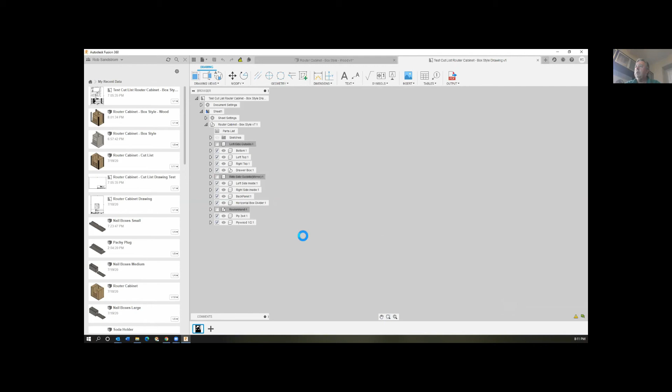Okay, you see that drawing? There's a cut, see, there's a cut diagram. I think it'll fall apart here because I made so many changes, but we'll see. So see this little button up here has an exclamation mark, can you see it on your screen? Yep. If you click that, it's telling you your reference drawing has changed. And if you change that - I see it messed up because I changed it so radically. I changed it back and stuff.

So it's going off the view you're looking at at the time. So it changed everything because it's trying to point to the same components, which are now back in the box instead of the cut diagram. Remember, because I replayed the timeline back. But if I left it where it was and I hit update, any changes I made to that cut diagram would have shown up on here.

Okay, well, I'll try that. I'm not going to save it. So, anyway, yeah, oh, thanks, Rob.

I gotta think about whether you could make a second design that used the same components. Well, if you can duplicate it, then if you make changes to one, it makes changes to the other, and that's the one that goes to the drawing. I don't know, I did that at first. I actually made a copy of what I thought was my final drawing, and then I took that all the way to the cut diagram, like you're suggesting. And so then I thought, well, that's cool, I got everything I needed.

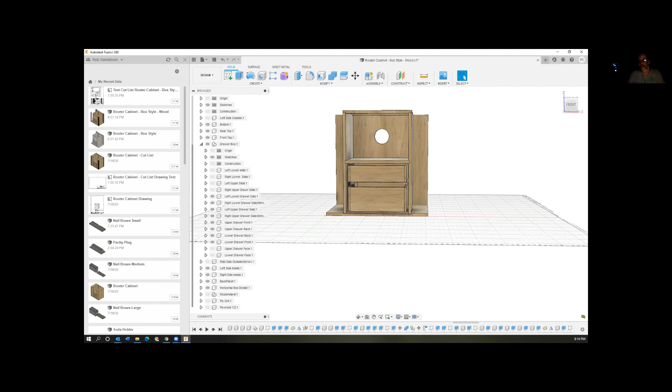A while ago I was looking to put a little battery-powered UPS on my Raspberry Pi because I thought it would be handy. I had a small battery charger like you'd use to charge a tablet or phone, and found one that would stay plugged in and keep outputting power while charging, instead of cutting off like most do. But the problem was it didn't put out more than about an amp when plugged into the charger, and the Raspberry Pi, running 2 3D printers off Octoprint, wanted a couple amps, so it didn't cut it. But it would have solved my brownout problem otherwise.

Anyway, that's geeky stuff. They used to make those filtered plugs for stereos that gave you real clean power—that might work for something like this, since I can't imagine anything else blinked or surged. Something with a simple filter on it might have worked.

How about a real UPS for a computer? Yeah, but that's kind of big for this. Not only that, but listening to Doug over the last few months, if you can buy it straight out he's not interested—he's got to build it. Usually stuff doesn't fit what I want; they come close, but it usually doesn't fit, or when I find it I think, well that could be done better.